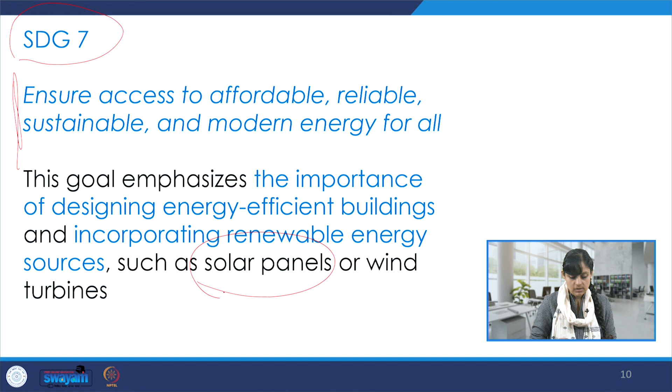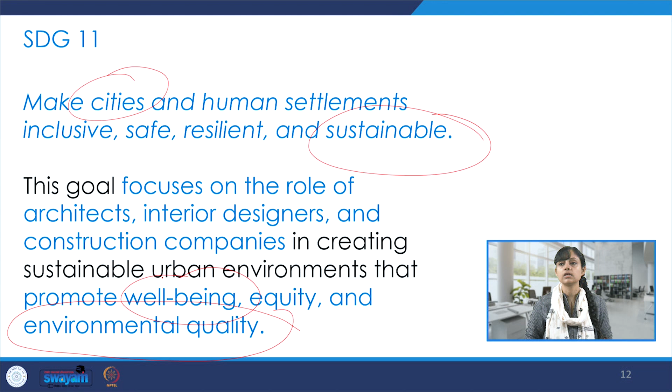And other shocks. There is SDG 11, make cities and human settlements inclusive, safe, resilient, and sustainable - very important keywords that I have highlighted here. This goal focuses on the role of architects, interior designers, and construction companies in creating sustainable urban environments and promoting well-being, equity, and environmental quality. So this is an important goal.

There is SDG 12, ensure sustainable consumption and production patterns. This goal emphasizes the importance of selecting sustainable materials, reducing waste, and minimizing the environmental impact of construction processes. So very, very relevant for us and very crucial to focus on this and learn how we could achieve this through our design sensibilities and by taking proper decisions on and off site, concentrating on interior design projects.

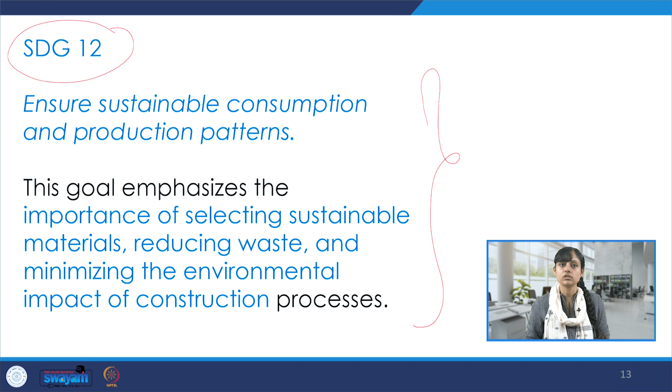There is SDG 13, take urgent action to combat climate change and its impacts. This goal underscores the urgent need for the design and construction industries to adopt climate responsive strategies such as energy efficiency, passive design, low carbon materials. These strategies help to reduce greenhouse gas emissions and increase resilience to climate change impacts.

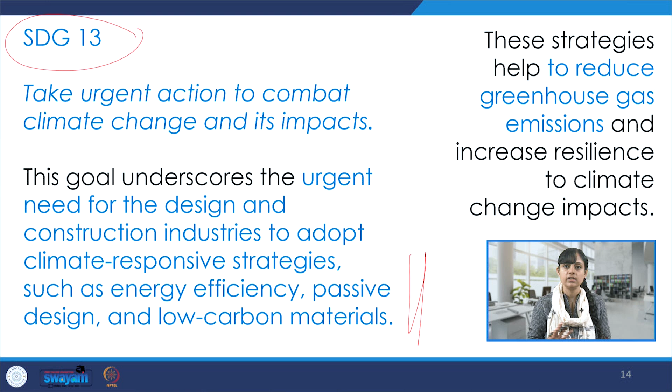So, we have been talking about all of these aspects in one or the other lecture, looking through the lens of sustainability, circularity, and responsible consumption. We can try to integrate and incorporate all of these aspects through our designs. By focusing on these critical SDGs, architects, interior designers, and construction companies can make a meaningful contribution to global sustainability efforts while creating built environments that are healthy, resilient, and adaptable to changing conditions.

So, these are surely policy level decisions at a global level, but small steps at local, regional, national, global, all sorts of levels and in different capacities can really help in achieving great results. So these are like ripple effects and they contribute to a larger picture.

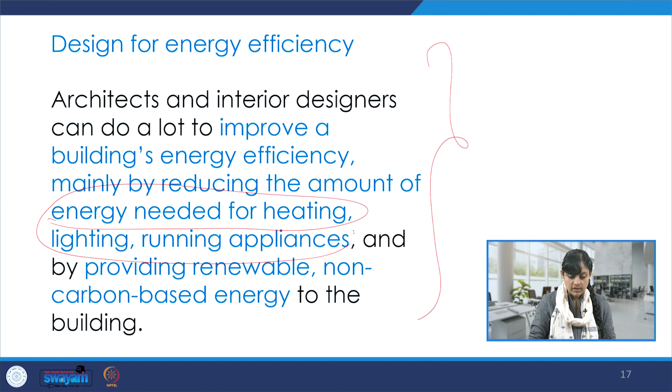Design for energy efficiency. Architects and interior designers can do a lot to improve a building's energy efficiency, mainly by reducing the amount of energy needed for heating, lighting, running appliances, and by providing renewable, non carbon based energy to the building. Now, this is very, very crucial. We must try to reduce the amount of energy needed for heating, lighting, running appliances, all of that.

So, heating and lighting are the two most crucial factors interior designers have influence over. Since most of the building's heat escapes through windows, it is important that the installed windows are of high quality and provide good insulation.

So, in the previous lecture, we did talk about VLT, SHGC, U value. So, all that understanding, daylight and daylight factor, etc., that can be applied when we design and talk about these kinds of important aspects related to heating and lighting.

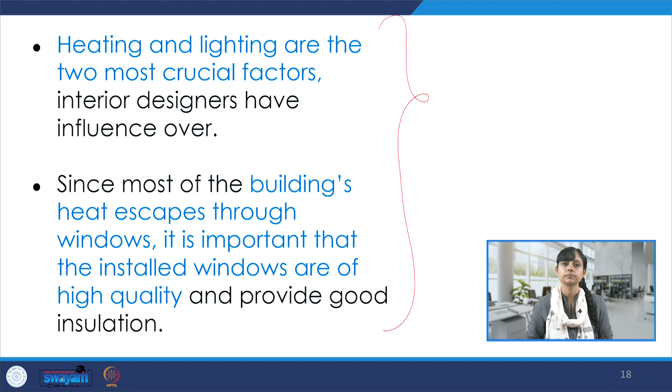Curtains and drapes keep both cold air and the sun's heat outside. Window coverings, blinds, and shades enable residents to control the building's temperature in an energy efficient way by opening and shutting them as needed. So, these are all very important rules and parameters that especially interior designers can follow and bring to the table while designing projects and designing spaces.

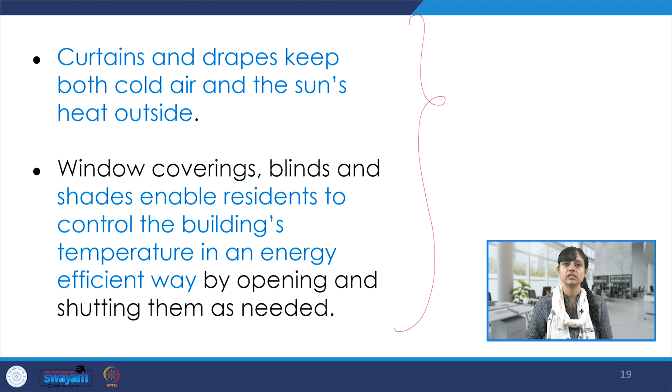Carpets are excellent thermal insulators. According to estimations, a carpet retains as much as 10% of a room's heat. So, we have been talking about fabrics and furnishings, and they are not merely for decor, but we see several other functions and very important ones.

Installing home automation and green gadgets makes it possible to control heating and lighting systems remotely as well. So technology is already there, for helping us.

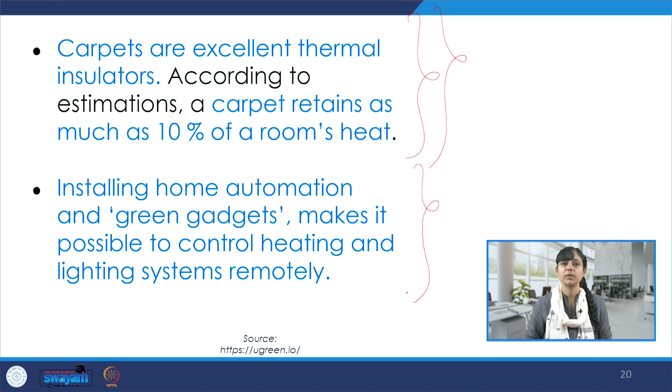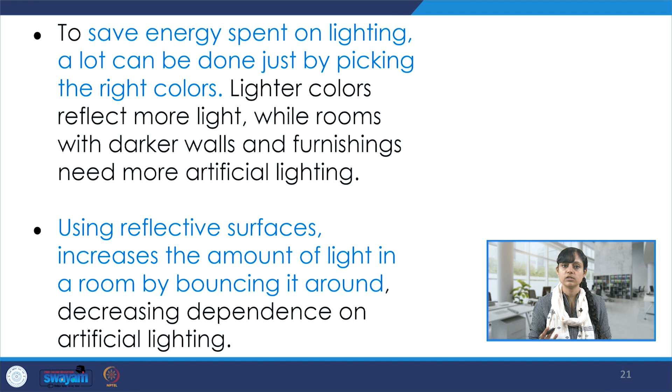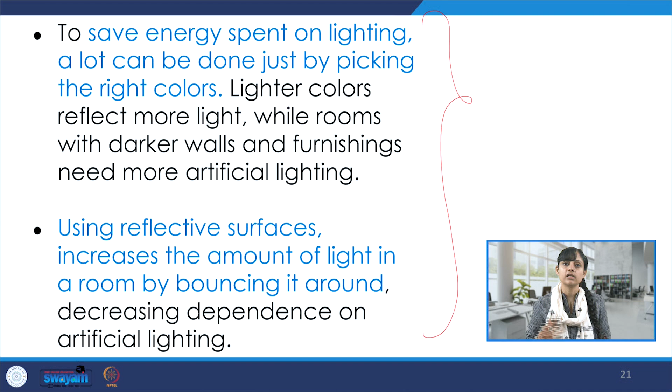So, these are all very important aspects, which are also emphasized in different policy related documents and directly contribute in getting your project designated as green and getting certification. This also helps residents and occupants to use the building's energy more efficiently and economically.

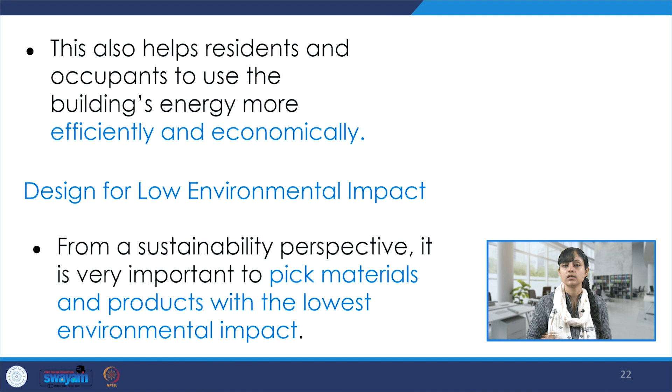Now, designing for low environmental impact, that's very important, and a lot of policy documents and our own understanding as designers guide us to follow this direction. From a sustainability perspective, it is very important to pick materials and products with the lowest environmental impact.

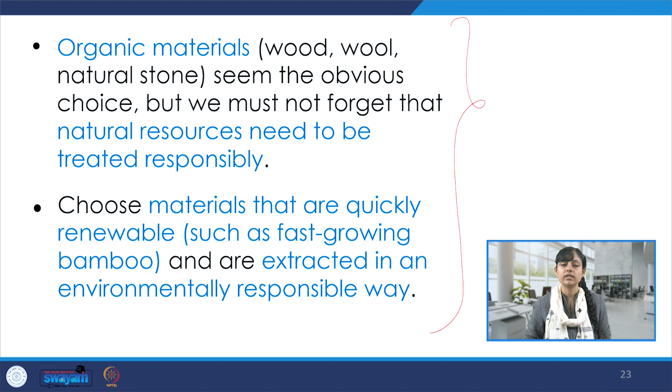Organic materials seem the obvious choice, but we must not forget that natural resources need to be treated responsibly. Choose materials that are quickly renewable, such as fast growing bamboo, and are extracted in an environmentally responsible way. So, we have been talking about ecologically growing trees, fast growing, replenishable materials which are organic, which have low chemicals and toxic material and toxic chemicals. So we can put all that understanding and knowledge to use when we are designing.

There are labels, standards, and certifications that give credible information about a product's origin and help identify eco-friendly products. We already have a lot of benchmarks, standards, agencies, and policy documents, and market-established standards that can help us identify whether a product is eco-friendly or not, organic or not, less harmful to the environment or not.

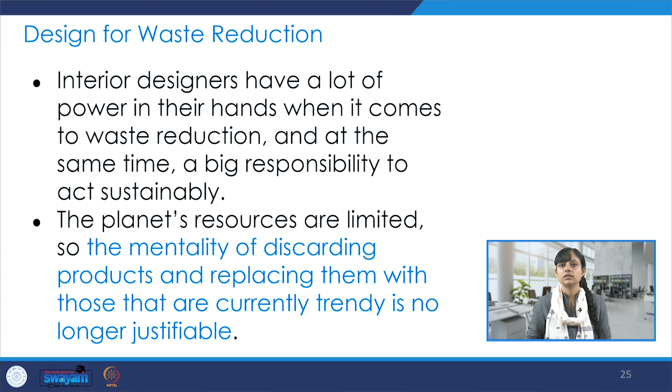Designing for waste reduction: interior designers have a lot of power in their hands when it comes to waste reduction, and at the same time, a big responsibility to act sustainably. The planet's resources are limited, so the mentality of discarding products and replacing them with whatever is currently trendy is no longer justifiable. We must use materials and resources very judiciously.

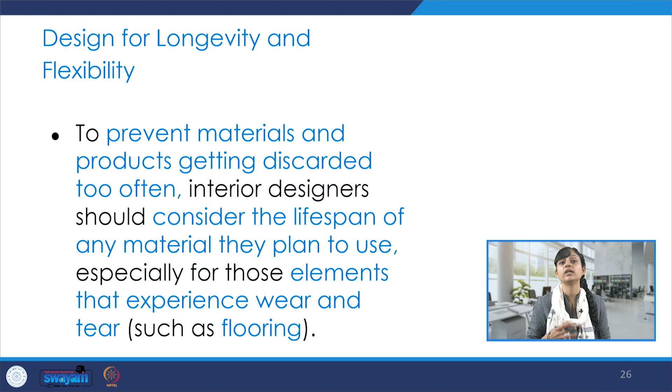Design for longevity and flexibility. To prevent materials and products from being discarded too often, interior designers should consider the lifespan of any materials they plan to use, especially for elements that experience wear and tear, such as flooring. The goal of designing for longevity is to design durable and timeless spaces and suppress the urge to change the whole design every couple of years.

As far as the interior design industry is concerned, designers' ideas are sought to create changing designs, a change of mood and space every few years, and there is a clientele base who would ask for that. Of course it's an individual's choice, a client's demand, but as a collective group focusing on sustainability and responsible design, we should try to suppress this urge of changing the design every year or two just for the heck of having something new.

So we have to base our decisions on what is actually required on site, and whether there is some kind of maintenance or real repair that's needed.

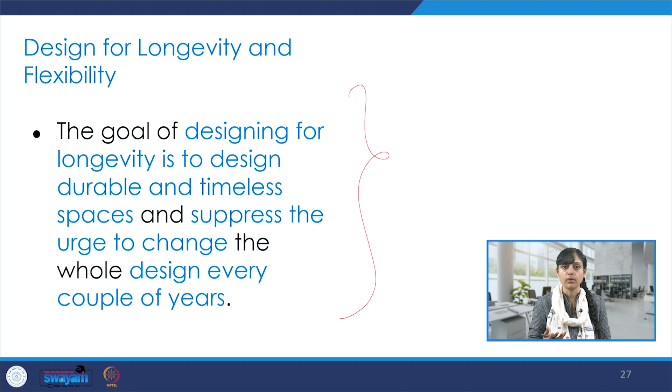The best way to achieve timelessness is to choose quality over quantity, classics over temporary fads, and simplicity and functionality over mere embellishments. Innovation has brought many options for achieving flexible designs, and we are going to talk about portability,

modularity, circularity, DIY, and many concepts related to achieving flexibility through design. We can make these important tools and media for achieving interesting designs which are innovative, sustainable, and which put less burden on the space and the different resources associated with designing that space.

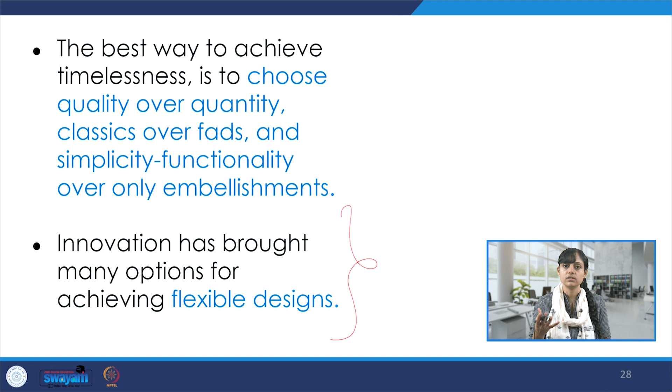Walls that can be modified to create more space - that's one example of flexibility in design. Adjustable and mobile furniture that can be reassembled to fit the needs of flexible modern workplaces. Modular flooring that allows personalization, easy replacement of individual pieces, and much more. There are a lot of innovations that could aid in providing flexibility in space, and cater to adjustments and multifunctionality.

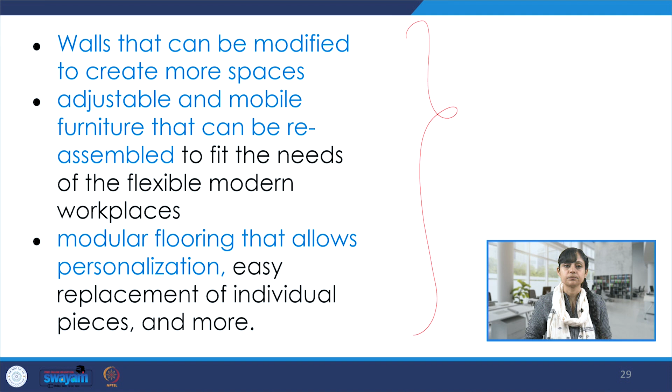Design for healthy environments: people spend most of their time indoors - in offices, schools, at home. This is very important, and I always make this point during my classes and discussions, as to why we need to focus on interiors and indoor spaces, and why we need to talk at the micro level and not only at the macro level, such as urban design. Because we spend most of our time indoors, it's very important that we design our interiors and indoor spaces keeping in mind the health and well-being of the users.

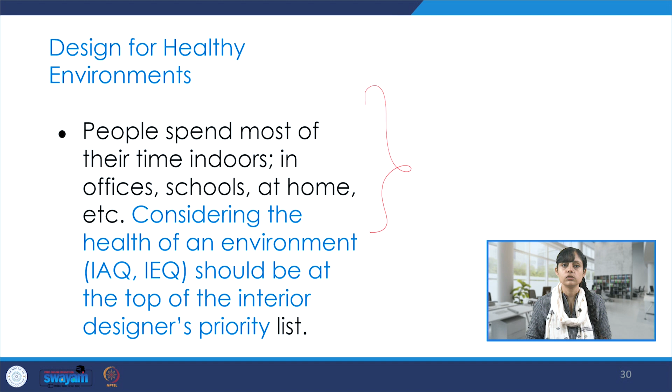Considering the health of an environment - and we have talked about indoor air quality, indoor environment quality, and we are going to talk more about it in subsequent lectures - should be at the top of the interior designer's priority list.

There are several factors to keep in mind when trying to design healthy spaces, such as the quality of air, heating, ventilation, lighting, and acoustics. All of these are important not only for sensory experiences and psychological reasons, but very much for well-being, functionality-related aspects, and as a feel-good factor too.

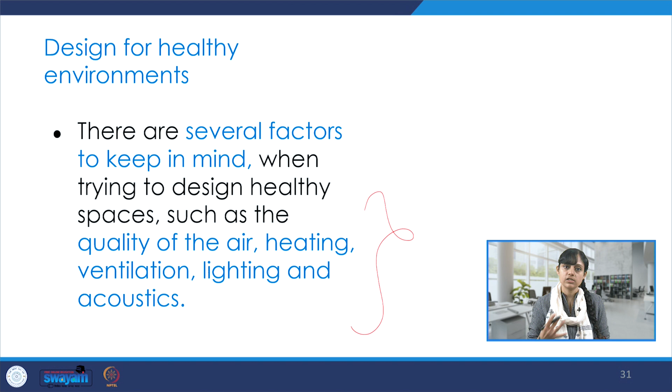According to the US Environmental Protection Agency, indoor air pollution is one of the five biggest environmental threats to public health. It is the result of products and materials with high levels of toxic emissions. Furniture or equipment treated with harmful chemicals releases dangerous toxins in the air. So it is very important that we design responsibly, pick and choose materials responsibly, and focus on less harm to the environment and the well being of the users.

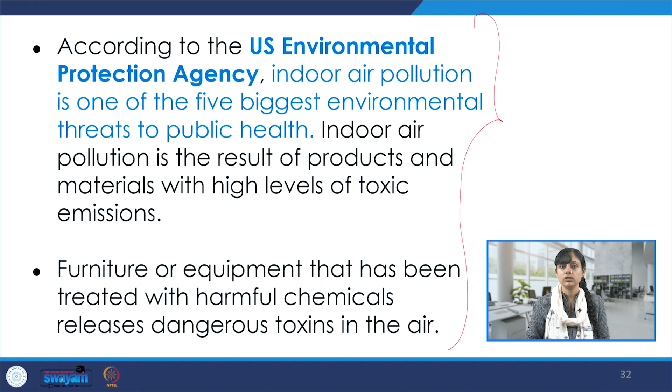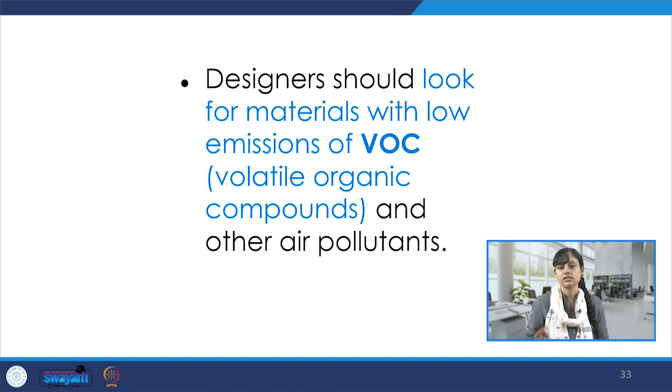Designers should look for materials with low emissions of VOC, volatile organic compounds, and other air pollutants. Now, talking about materials and sustainability, these are very important areas of focus when we talk about policy level decisions. The policies and documents reflect the important concentration on materials and how they directly contribute to achieving sustainability.

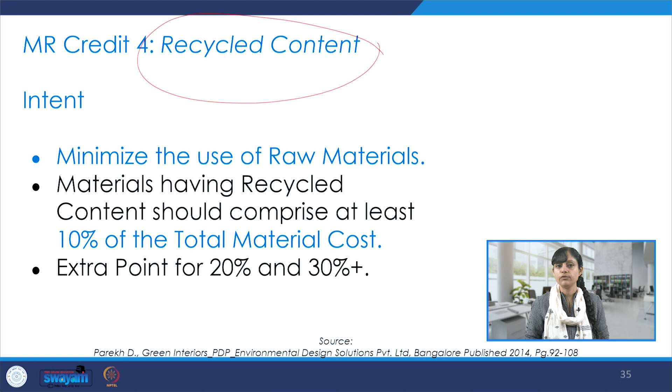So there is this credit that focuses on recycled content, and the intent behind this is to minimize the use of raw materials. Materials having recycled content should comprise at least 10% of the total material cost, and of course there are extra points for 20%, 30%, and more.

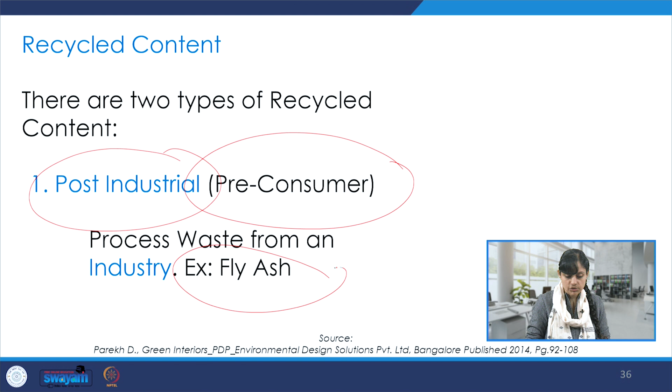There are two types of recycled content, broadly speaking. There is post industrial, or pre consumer - same thing - process waste from an industry, for example fly ash. That is the example of post industrial. And the other one is post consumer: waste from households, for example plastic bottles, aluminium cans.

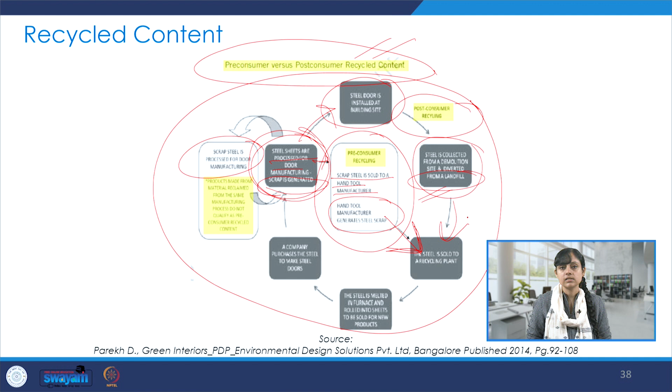When we talk about steel sheets, they are processed for door manufacturing, and then this steel door is installed at a building site. Then there is post consumer recycling involved here: steel is collected from a demolition site and diverted from a landfill. Next in this cycle, the steel is sold to a recycling plant, melted in a furnace, and rolled into sheets to be sold for new products. A company purchases the steel to make steel doors, and so on.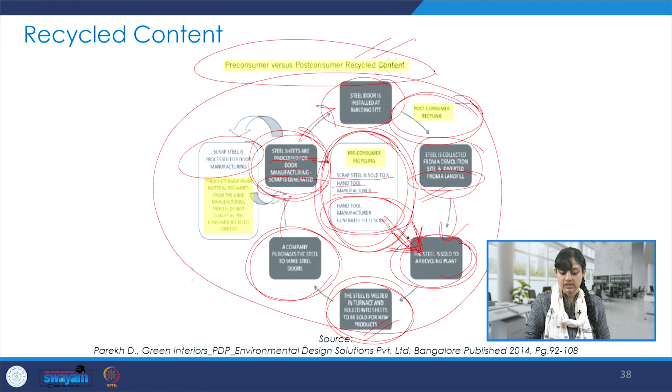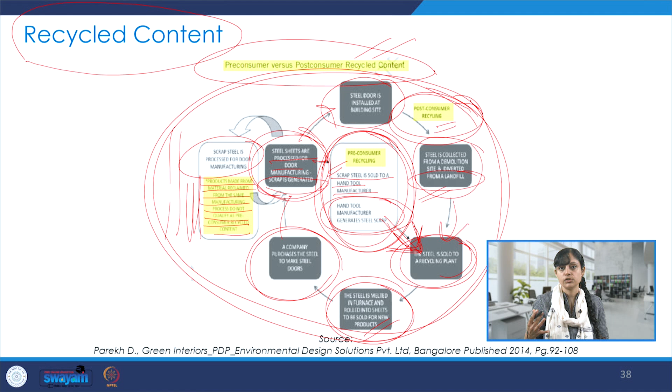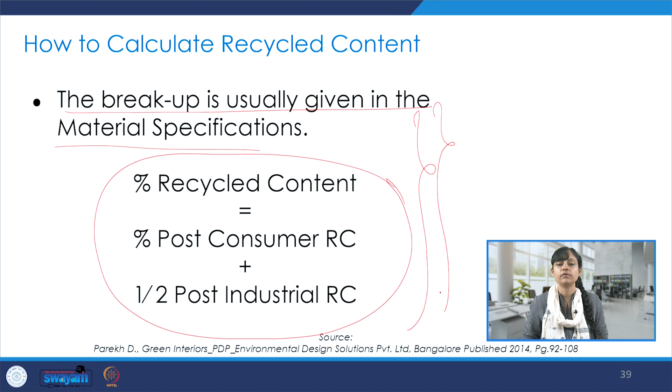How to calculate recycled content? The breakup is usually given in the material specifications for our benefit and convenience, and there is this simple formula that is sort of applied. This is for reference - I do not expect all of us to be well versed with equations and formulae and learn everything by heart, but this is for reference and you could use it as and when required. So, this is calculating recycled content.

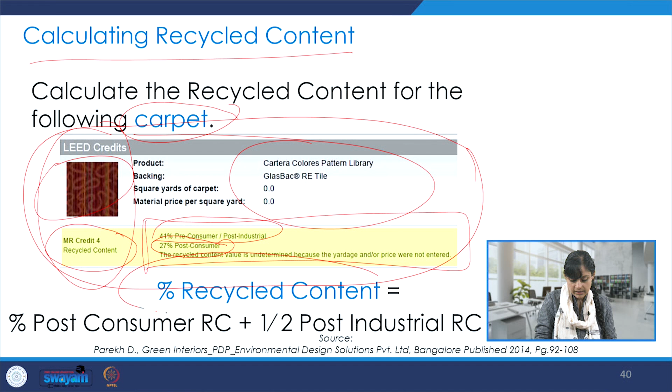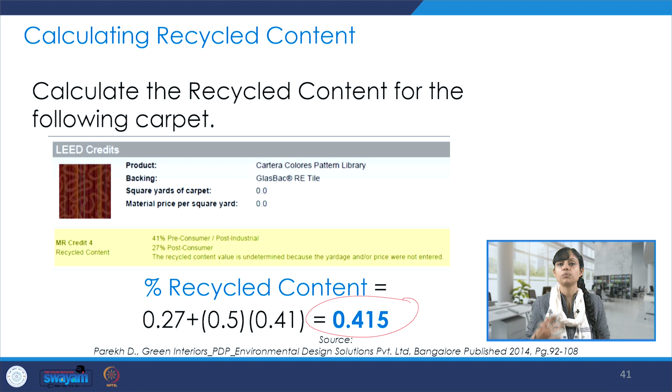Here is an example of the carpet. If we look at this product specification, we get the information handy for calculating recycled content. We see the MR credit for recycled content, and this is the specification: 41% pre consumer or post industrial, like we saw, and 27% post consumer. These are the details for this carpet, and this is how you calculate the recycled content. When we apply this formula, this is the calculation. There is some percentage of recycled content, and accordingly one would get credits and consideration while getting their project designated as green certified and responsible and less harmful to the environment.

There are some materials which we know popularly, and they have recycled content: plywood, gypsum, aluminium, carpet - the example we just saw - steel, and also modular furniture, which is used quite extensively in interior design projects.

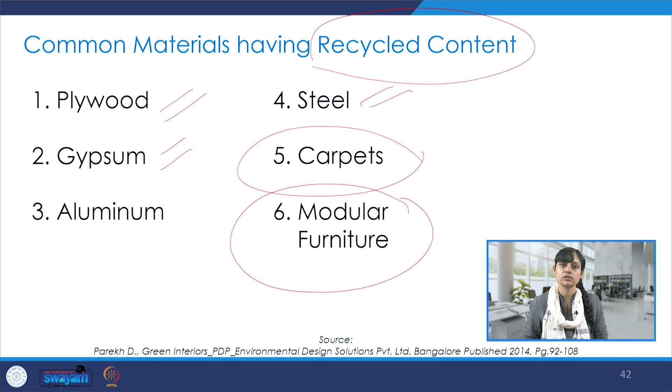Recycled content is important to understand as a concept and also how we actually do the breakup and calculations. So what kind of waste does steel usually have? Post industrial, post consumer, and we saw one cycle in one example.

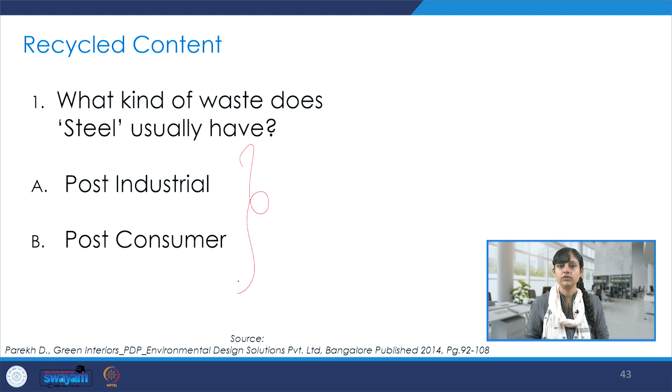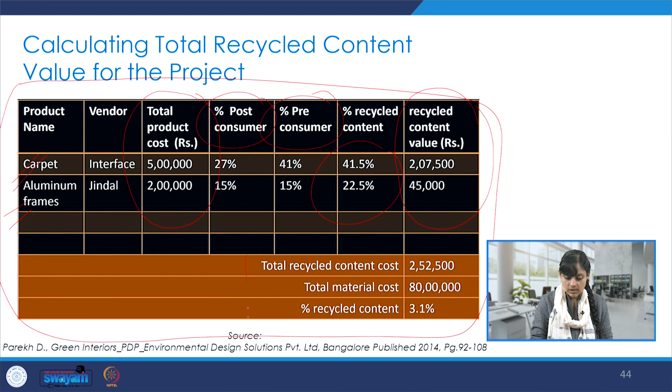So if we try to put statistics like this in front of clientele and try to make them aware of the incentivization, it definitely helps, and it also clears a lot of concepts for the client who may or may not be aware of these technical aspects, who may or may not have any orientation or awareness towards green interiors. So these kinds of calculations and numbers definitely help put up a strong case.

Then there is credit 5, and it focuses on regional materials. This is actually very encouraging, that there is some value and some kind of consideration for materials which can be procured at a regional level.

The intent: use locally sourced material to encourage local economy and reduce environmental impact due to transportation. We also know this aspect about embodied energy and why we should try to minimize transporting materials, and we should get it from a certain radius, which we talked about in the previous lecture.

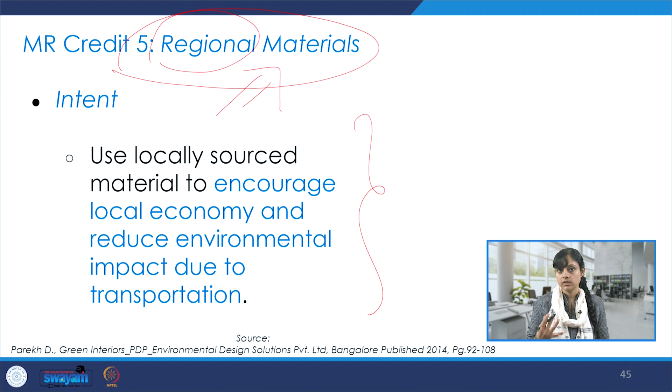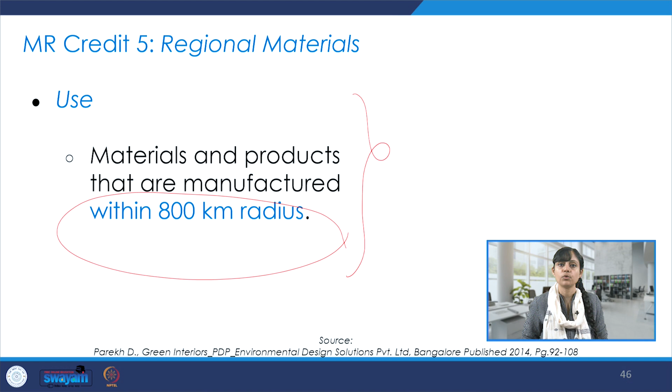The use: materials and products that are manufactured within an 800-kilometer radius, so we have it here also, and it's considered to be a sort of a sustainability radius if we are able to procure materials and products within this radius. Regionally manufactured materials should be at least 20% of the total material cost.

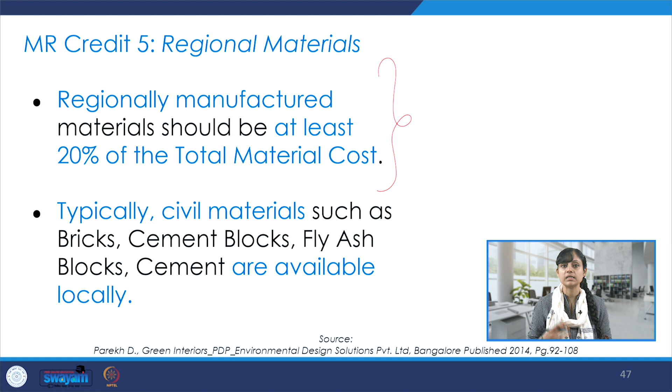Typically, civil materials such as bricks, cement blocks, fly ash blocks, cement are available locally. Other materials include aluminium frames, plywood, laminates, gypsum, which may or may not be available locally. So we have to see within the regional materials, some which are available locally and some which are procured from nearby.

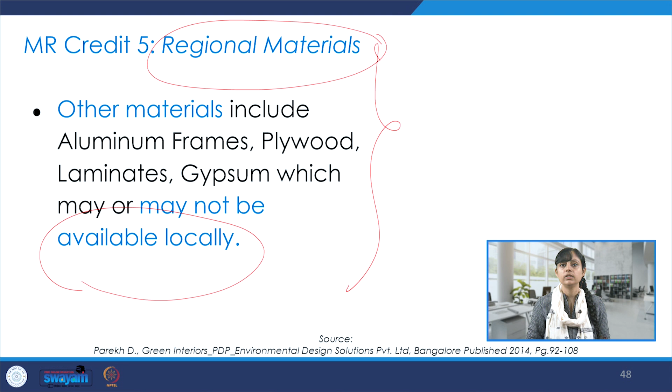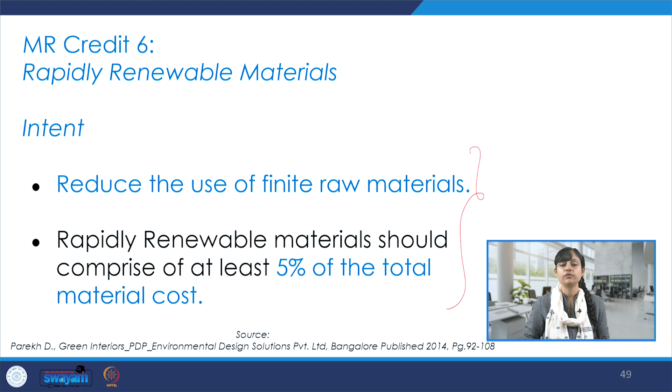Then there is credit number 6, rapidly renewable materials, and the intent: reduce the use of finite raw materials. Rapidly renewable materials should comprise at least 5% of the total material cost. So these are all policy level decisions and standards which are now sort of used as benchmarks for achieving different credits.

Rapidly renewable plants are harvested within a 10-year or shorter cycle. This is important, we have to keep this in mind. There are so many laws related to procuring timber and related to trees, because there are trees which take hundreds of years to grow, and when they are cut, it disrupts the entire nature and cycle.

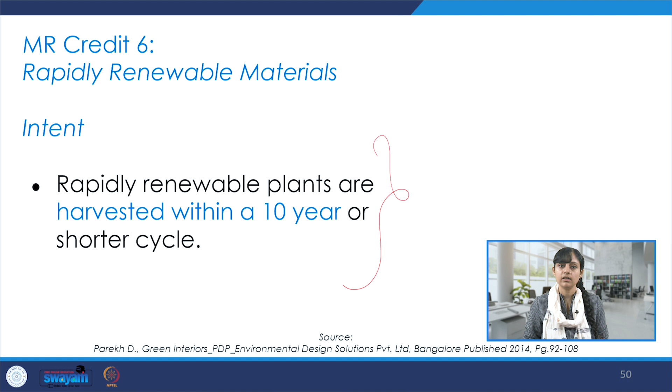So we have to keep in mind the rapidly renewable plants, as they are less harmful for the environment. Some examples of rapidly renewing materials: cork, bamboo, rubber, linoleum, wheat, straw, eucalyptus. Softwoods like eucalyptus again can be harvested easily.

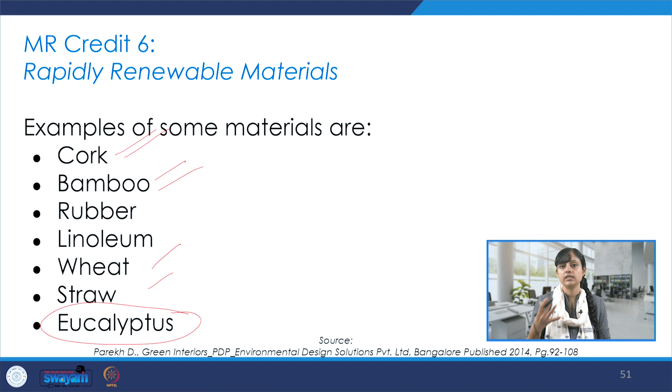So we have to keep in mind all these important aspects because we are facing a huge crisis. There is climate change and there are lots of issues we are facing. So if we develop an understanding about these important concepts and we understand the existing standards and policy level decisions, I'm sure this can help us take responsible, informed decisions, which have less harm on the environment.

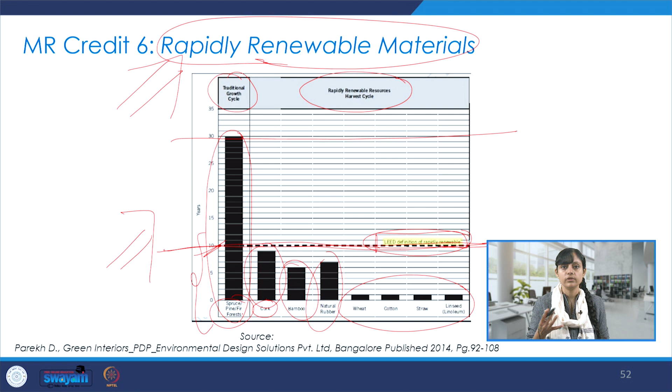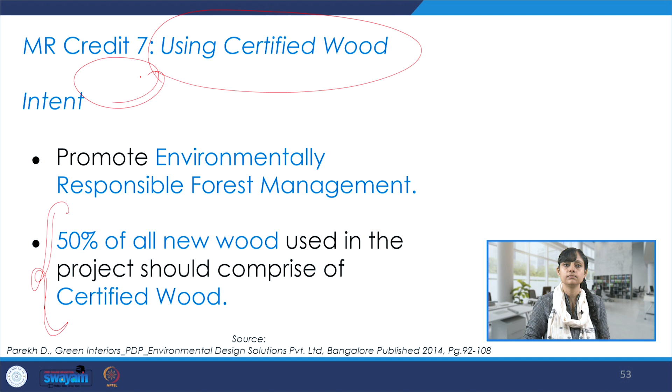Third party certification such as FSC is required. So that's another important aspect.

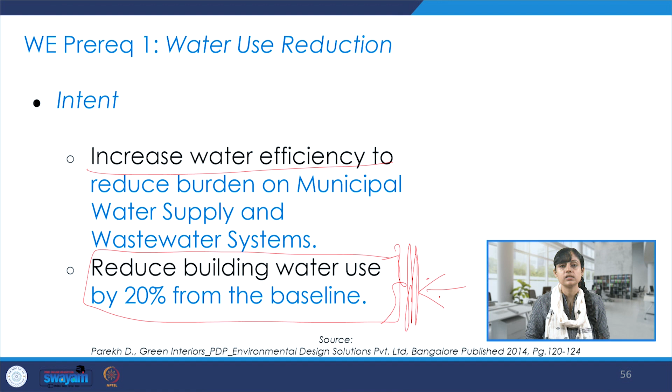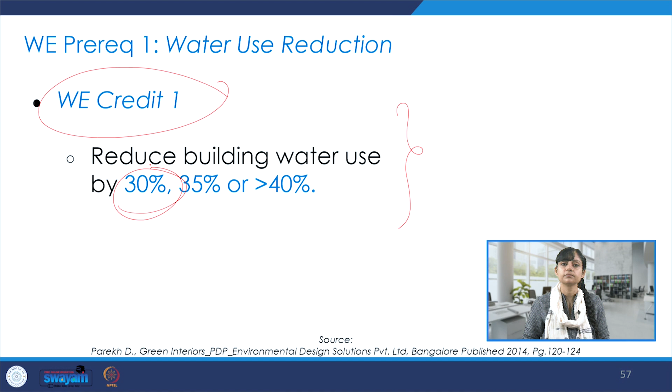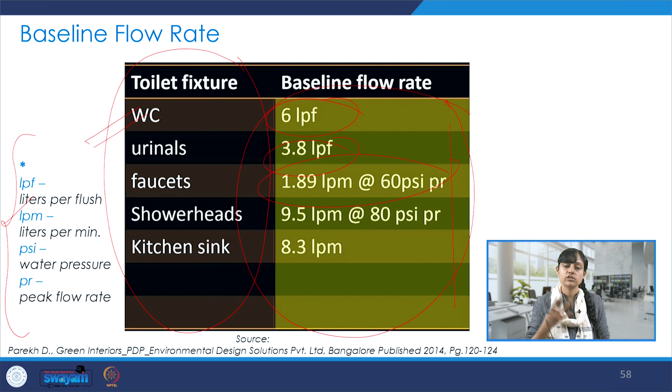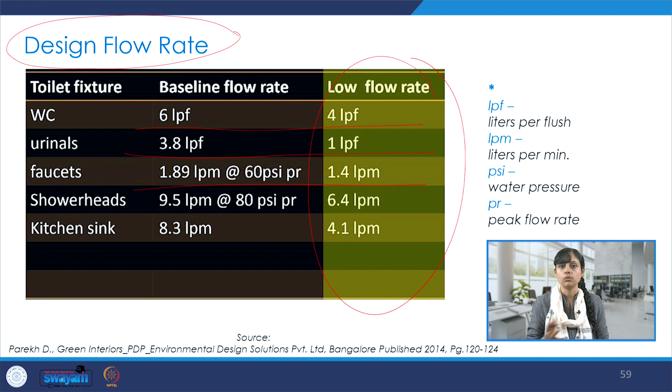Through design interventions, conventional fixtures have anyway been changed these days, so we can try to do that. If we see the design flow rate, it is of course lower than the baseline flow rate, because of the concern for water saving. So this is the kind of reduction we see in numbers, from 6 to 4, 9.5 to 6.4, and so on. This is the percentage of water savings which can be achieved.

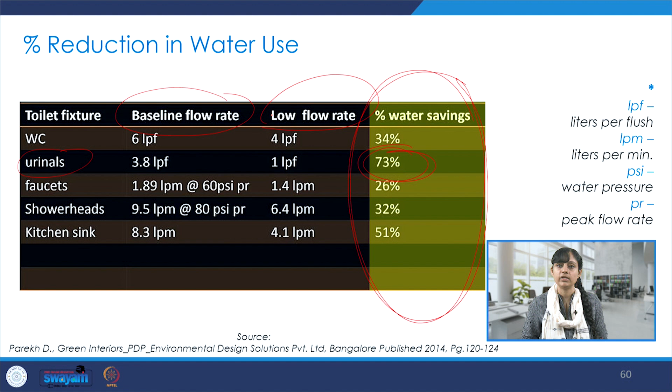So it's very important to concentrate on water savings. We can see at a few places it is significant, like 73% water savings when we are focusing on urinals, trying to reduce from the baseline flow rate to a low flow rate with the help of proper design interventions and innovative designs.

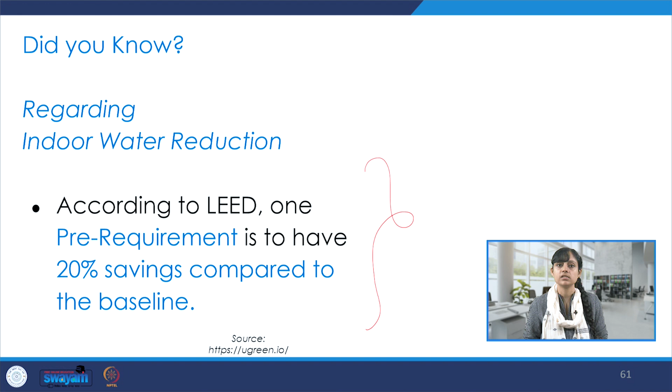Regarding indoor water reduction, according to LEED, one pre-requirement is to have 20% savings compared to the baseline. These are again very important statistics that help us put things in perspective and concentrate on savings and less burden on resources and environment.

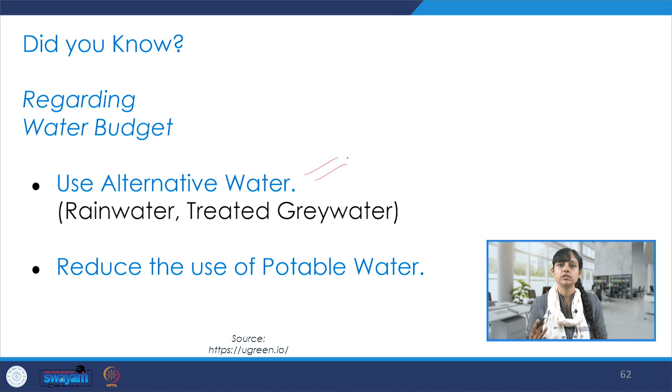Regarding water budget: use alternative water, rainwater, treated grey water, to reduce the use of potable water.

Then there are other criteria, some factors which have not been discussed so far. Here we can talk about acoustic requirements, which are very important for indoor spaces and interior design projects. The thumb rule is the ABC of acoustic design: absorb, block, cover. So we try to create a space or environment that is acoustically favorable, with less disturbance, less noise, appropriate decibel levels, no disturbance to fellow users, and many other criteria.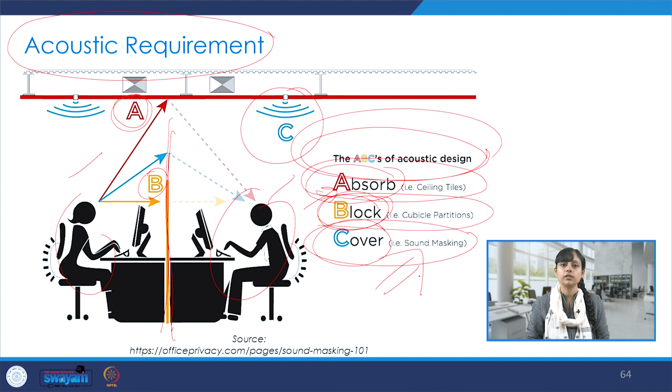Then there is a credit for construction waste management: ensure waste materials are diverted from the landfill and can be reused or recycled. So diverting 50% from landfill is one way to achieve credits, and diverting 75% from the landfill is, of course, even better.

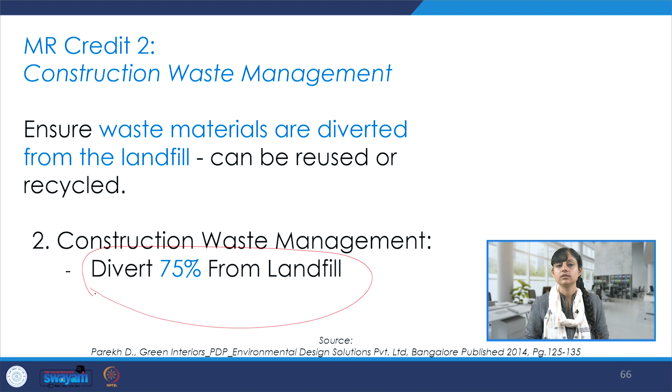There is also a very important role of materials, and a crucial role played by all stakeholders. When we talk about architects, it's predominantly at the design stage, but of course there are overlaps and interactions also at the construction and occupancy stages. The contractor is predominantly involved at the construction stage, but there are more interrelationships when we talk about this matrix. And the owner is predominantly involved at the occupancy stage, but of course with other overlaps as well.

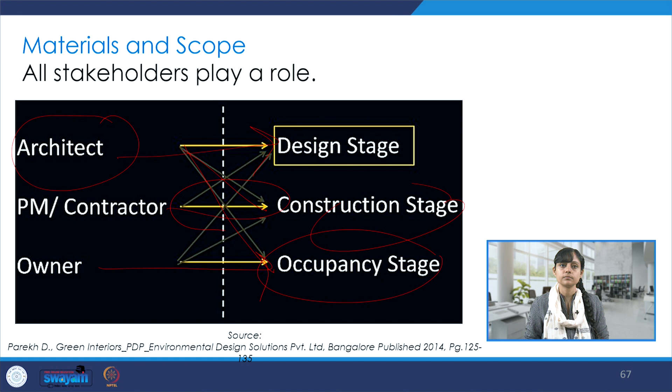So when we talk about the design stage, it's very important to concentrate on material selection, material specification, and the overall cost implication depending on the selection criteria. Executing as per the specifications and requirements, material management, and construction waste management are very important aspects when we talk about material selection.

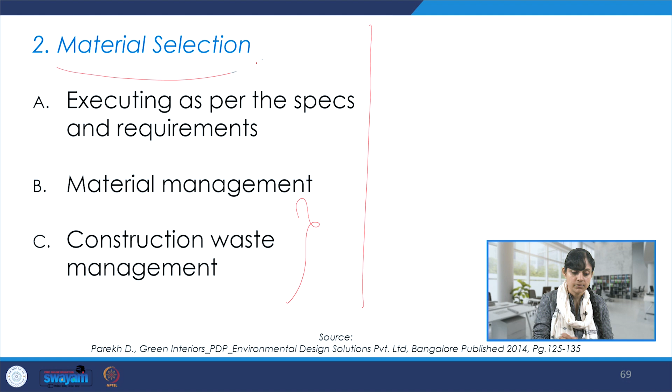Synergy with environmental factors, energy and atmosphere - there are certain points allotted to this, and lots of important parameters within it. Minimum energy performance depends on building facade materials. Optimize energy performance, lighting power, daylight, LPD - all of that we saw in lecture number 23, so there are points assigned for that. Also lighting controls, HVAC - so many points which cumulatively create a certain tally when we're talking about energy and atmosphere.

Then there is IEQ, we have been emphasizing its importance and the possible points. Daylight and views - what is the glass specification, what kind of glass is being used, what percentage of views is facilitated - all of these important aspects have certain credits and points assigned. It's not only about picking a few things to match the number tally and get points, it's also the fundamentals of design. Why would you pick a certain material? Why would you design something like that? How do you achieve a certain orientation of the building? All of these, hand in hand with technical specifications, help us achieve credits which demonstrate a very sensible, sensitive, responsible design that is less harmful to the environment.

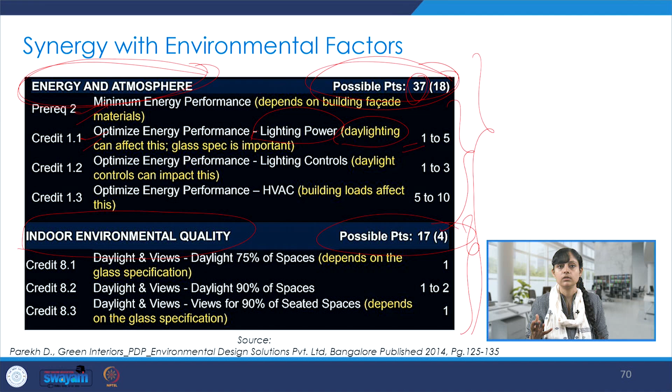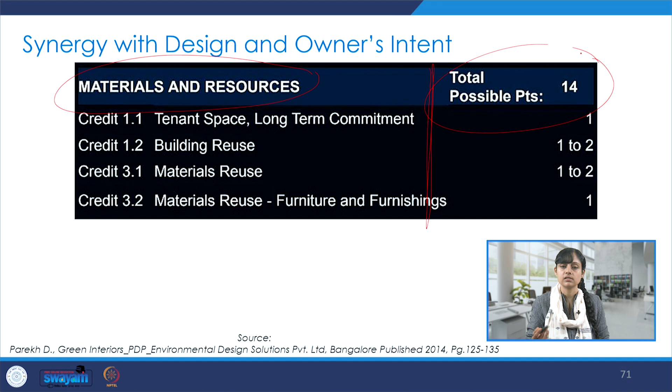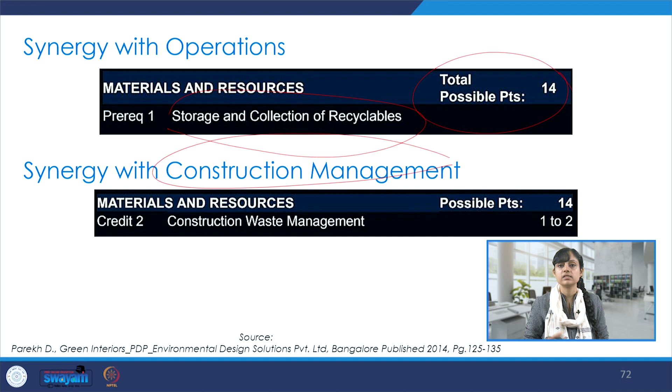Then, of course, materials and resources. Within that we have building reuse, materials reuse, furniture and furnishings, and there are certain points credited against this. Synergy with operations - storage and collection of recyclables also has certain points. Synergy with construction management - construction waste management, a very important topic of discussion right now - and there are possible points assigned to it.

Continuing with this, I'd also like to focus on the importance of the environmental assessment matrix. I'm not discussing this in detail, it needs another elaborate discussion altogether, but it's very important to practice this calculation and development of the matrix for our own understanding as designers when we're working on projects, and also for the benefit of the clientele and a larger base, especially when we're talking about procuring green certification.

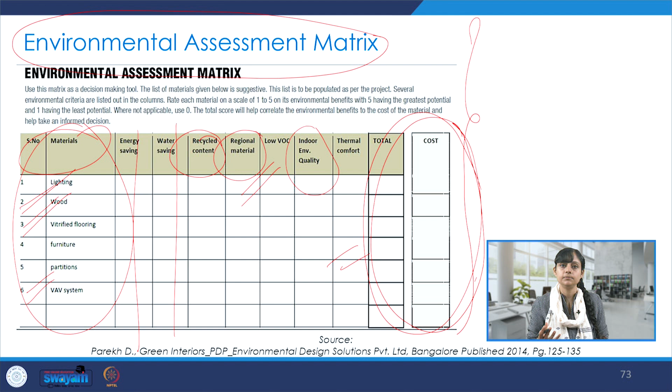This kind of matrix really helps, whether it's lighting, wood, flooring, furniture, partitions, or other important materials and systems being used. What is the energy saving, water saving, how much is the recycled content, how much is the regional material, how much have you reduced volatile organic compounds, the IEQ, the thermal comfort, and also in terms of costing. So this matrix helps in assessing the impact of what we design on the environment, on our surroundings, how much burden there is on resources, and how much we're able to actually reduce it. It's a very healthy, promising, recommended practice to work with matrices like this.

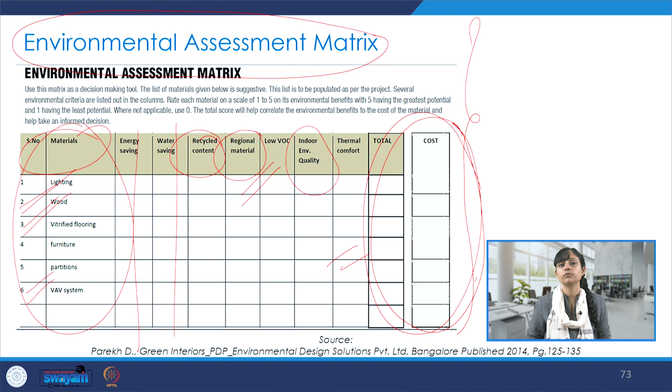So all materials have some benefits and some limitations. Understanding a material in its entirety is very important at the beginning of the project itself. Developing a sustainability roadmap is helpful to select materials. This is very important - I encourage all the young designers and audiences listening to me, who are part of this course, to give this a lot of importance. Prepare a sustainability roadmap for your initiatives and projects.

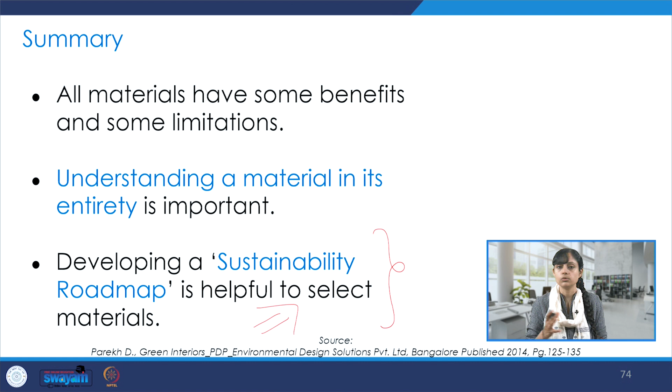Always remember the function and context of the building. Not all green materials are expensive - that could be a myth, something that discourages us from incorporating these important aspects in our designs. The right decision taken at the right time can save cost.